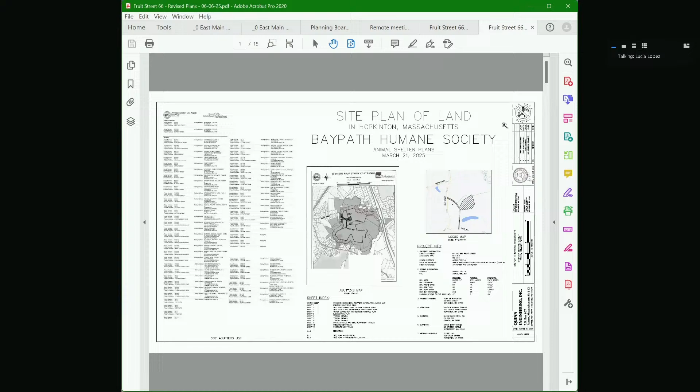To the chair, yes, Lucia. I did have a question unrelated to the waiver. There are several site plans in our packet, they're all labeled March 21, 2025, and I know that the site plan's been revised several times. I don't know if there is an updated date on those. I just was thinking in terms of the process to make sure it's the right one.

Yeah, I see that even though the file names have June 6th, the dates are still March 21st. John, is there comment on that? So the plans you're talking about? The plans, yes. Yeah, so I've brought up the plans here. And what they do is, so the plans are dated March, whatever it is, but then we go by this revision date, and that's the most recent. So the most recent we have is from June 9th. So that was probably just a typo on my part.

That's actually probably a typo on my part, but that's usually what we do, is follow the most revised date. So when we actually write the decision, it'll say, and you'll see it in the comment or in the conditions, as of date, June -- is it June 9th or June 6th? Dated March 21st, 2025, last revised, and then that date, June 9th. Okay, thank you.

Okay. So on the subject of the trees, for those of us that were on the site walk, I think we looked around as well, and most of them were fairly junior trees. So that was something that I think a lot of us saw.

Does anybody have any concerns, either requiring -- do people have opinions on whether a waiver would be required in the situation? I mean, John, do you have an opinion on whether a waiver would make sense here? I don't have an opinion. Trying to find the exact terminology. This is up to the discretion of the board, right? So it's not requiring a waiver.

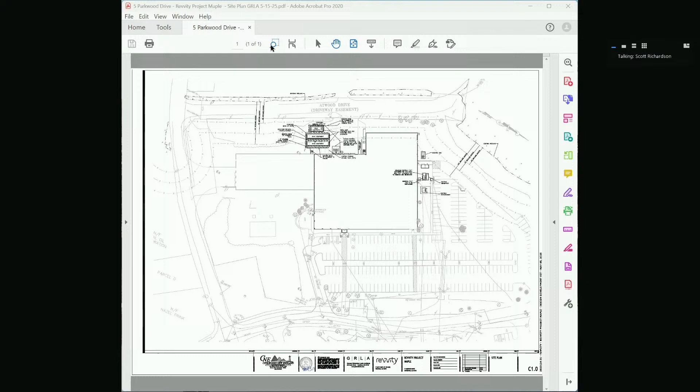Interestingly, the ground-mounted equipment is actually being located in a former paved parking area, where we're basically going to be removing some pavement, installing some concrete slabs and some stone. So we're actually increasing some pervious area, as you can see in the site plan, towards the back off of Atwood Drive. And interestingly again, this is in the buffer zone.

So the applicant has applied to the Conservation Commission. They've had their initial meeting and initial findings, and they have a subsequent meeting tomorrow evening. So it's basically in front of the planning board for the installation of this ground-mounted equipment, as well as the rooftop exhaust systems.

These rooftop systems are not insignificant, but we believe that since they are not too visible from public ways, the front of the building and the side of the building on Elm Street, the most visible part is this equipment in the back, off of Atwood Drive, which is primarily an industrial drive that accesses the business.

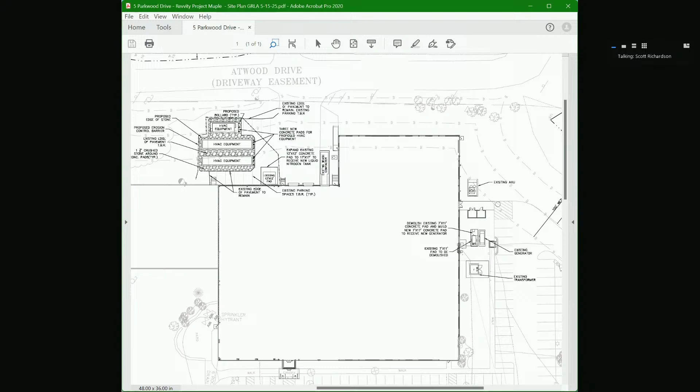There are some renderings in the package that do show the equipment and so on. Interestingly, the other aspect is the parking.

So if you go to view number 1, you'll see this is kind of going down Parkwood Drive. The building in question is on the left, which we're looking at here. And you can just see there's about a 6-foot rise to the front door from Parkwood.

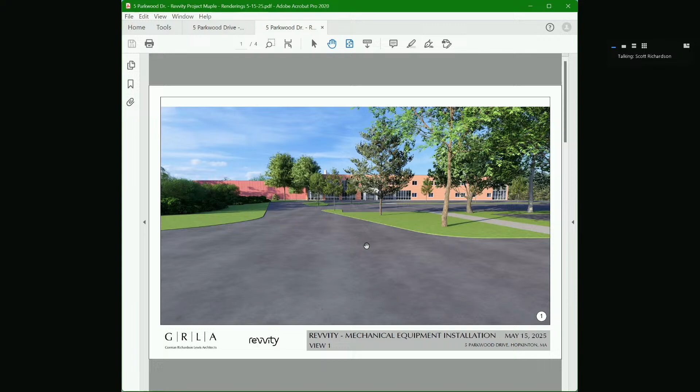And then you do see one or two of the exhausts there in between, kind of towards the center of the picture, that do stick up a little bit above the roof line. They would be extending about 16 feet above the main roof, but because of where they're located, really set back from the front of the building, well over 100 feet, this is about what you'd be seeing.

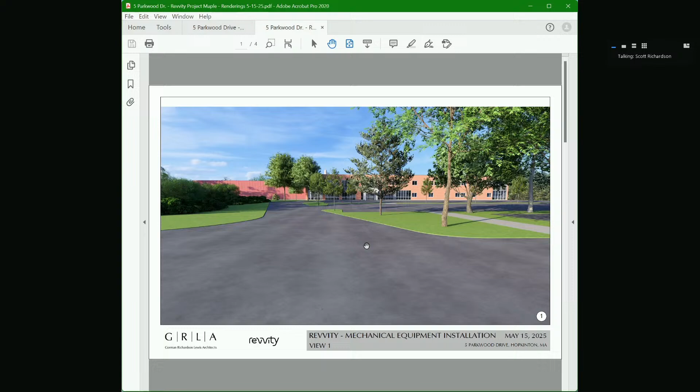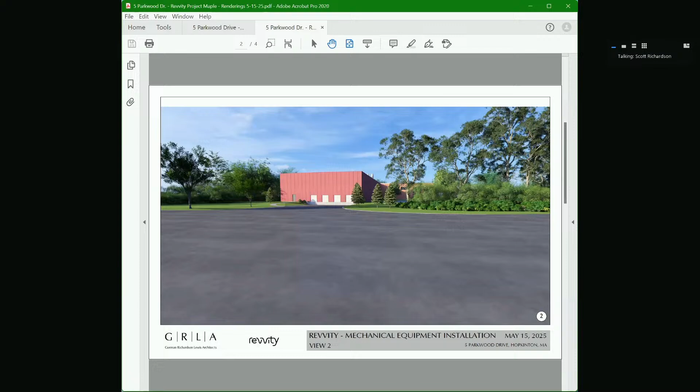View 2 is the view off of Elm Street, where there's a loading area for Revvity, and you can just see a couple of the exhaust equipment just peeking above the roof, kind of again in the center of the rendering.

The next rendering shows a view from Atwood. This is the ground-mounted equipment that then has ducts that extend up to and over the roof. So this is the larger equipment, and for a variety of reasons, we're locating them on the ground because it is really the best location for these pieces of equipment.

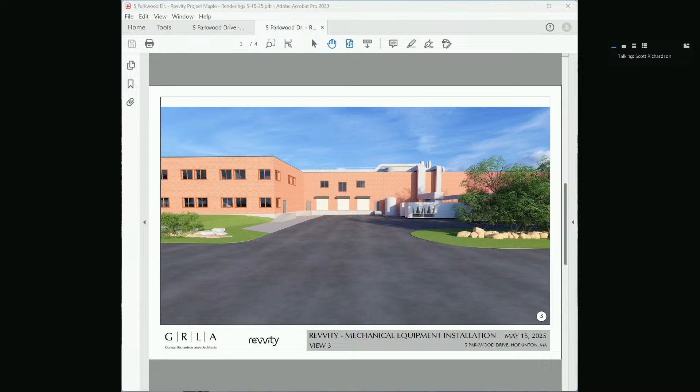And then this is the existing loading area for Revvity at this location, additional loading. And then the last view is as you would drive further down Atwood, you'd have a view looking back at the ductwork that's extending up on the roof.

The other thing is that the ground mounted equipment is also displacing some parking spaces. But interestingly, in the original approval for the project back in 2012, where we did additions to both buildings and renovations, we did get a waiver for parking at that time. Basically, given the use of the building as a lab space and research and development, the number of occupants was far below what the bylaws were requiring. So we did get a waiver for parking for future, basically saying if we need this parking, we can build it.

So the original parking on the site was 488 spaces. Based on the use of the building now and the lab requirements and the occupancy and the current parking regulations, based on the square footages for both buildings and the use of the buildings, we actually only are required to have 433 parking spaces.

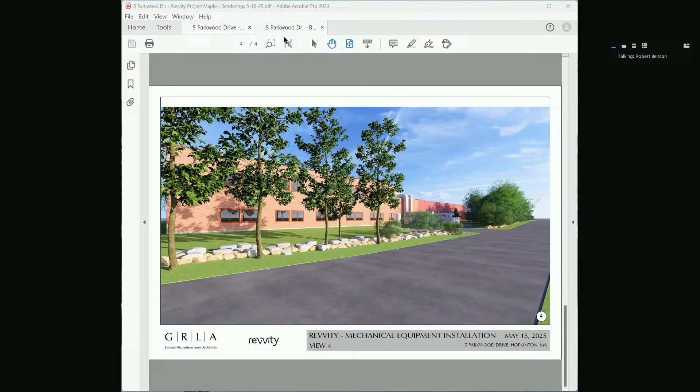Does everybody on the board understand this isn't like industrial, or like the buildings that are behind the All Town Fresh, in that section, that's where these buildings are.

Does anyone feel a site walk is necessary in this instance? I'm of the mindset this wouldn't warrant a site walk, unless anybody feels strongly otherwise. I agree. I don't think we need a site walk.

Does anybody have any initial questions for the applicant? Or otherwise, I'm going to try to get right into the hearing, follow our outline.

Matthew, go ahead. Not for the applicant, I don't think, but for John, I'm just confirming that because the parking lot is actually shrinking, the EVSE requirements don't come into play here. Is that accurate? Yeah, correct. Okay, thank you.

Through the chair, is that electric vehicle charging requirement you're saying? Yeah, in the past couple of years we as a town added bylaw language requiring electrical vehicle spaces, or EV ready spaces, but because this isn't a new project, that requirement is not there. I'm pretty sure Revvity has installed some EV charging stations on site. Okay, good to know.

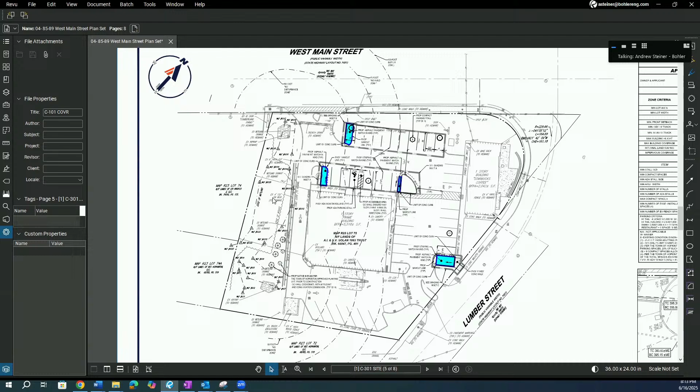We haven't necessarily seen anything formal, but understand there may be comments or concerns from additional town departments. So obviously we're here seeking approval, but understand we may need to continue to work through any of those comments, concerns, or questions that different departments may have. But we definitely wanted to take the opportunity to present in front of the board this evening and get some additional feedback. So with that, I'll turn it back over.

Thanks, Andrew. John, can you give us a staff report on this proposed project?

Sure. So this is a minor site plan because they are modifying a parking area. However, it does not meet the criteria for a major site plan in terms of parking lots.

One thing the applicant has noted is that there have been some concerns from DPW. They're concerned that the stormwater is not going to be managed appropriately. So that brings up a question for the planning board: we usually don't have the peer review consultants on board doing the review for minor site plans like this without the board requesting them. So that's something the board should decide, whether we want to get a peer review on this or not. We have not gotten one done yet.

That was going to be my question - was it due to the water accumulation that's been occurring near the entrance on Main? I was curious how the applicant was taking that into consideration.

I'm with John that we should probably have a consultant review, and that was one of the questions I had. The other comment I have is regarding the waiver for the EVSE. It is a minor change - they would have to rip up the parking lot to add the required EVSE or EV ready spaces. So it seems like in this situation, a waiver may be warranted for not providing that EV parking space.

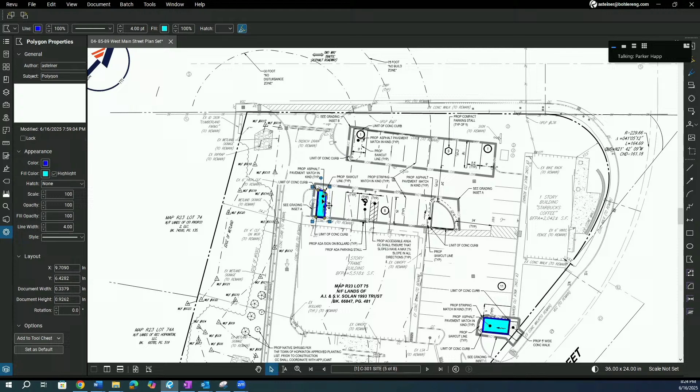Yep, so the town put the border or barrier to not do a left turn because there were some pretty severe T-bones that happened. I think it's a lot safer now. Was there any consideration in doing a major adjustment to this plan and effectively making it one-way in, taking more space back from where that curbing is, limiting essentially that to just an entrance and putting more spaces there? Was that part of your guys' consideration at all, just out of curiosity, or not really?

So go ahead, Andrew. Oh, sorry. So we tried to maintain the existing traffic patterns as part of this, which include, I think we included a truck turn exhibit, which shows the Hopkinton fire truck navigating the site. So we didn't really want to make any changes in that regard, which again shows the right-hand turn coming out of the site onto West Main.

I'm sorry, you lost me. What does a fire truck have to do with considering removing the exit? Just in terms of circulation, to make sure that we weren't impacting the current layout and how an emergency vehicle would navigate the site as it is today.

So your concern is that if you take space back from adjusting that, a fire truck couldn't navigate around the building on the left side if they were going to go behind the bank out that way, essentially? Is that what you're saying? Potentially. So the way we had the fire truck come in from Lumber, because this is the signalized intersection here, it pulls into the site and can circulate as it is now, but they could come back out and head this way, I suppose. Coming up and coming out is I think currently what would happen today, but I think that would be something we'd have to ultimately get feedback from fire on.

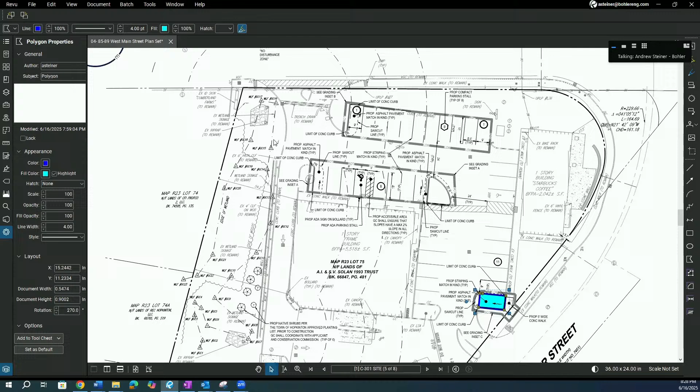Lucia, go ahead. I see that there's a requested waiver for EV parking, and I was wondering what triggered the need for a waiver.

And I think Vic asked that question, right? So our town bylaw changed from the time this was built to now. So when they built this site out, there was no EV parking requirement in terms of EV ready spaces or EV spaces in general, so the requirement wasn't there. So this minor site plan change to add 4 parking spaces would require the waiver, because when they originally built the parking lot and the buildings, there was no requirement.

And if the waiver were not granted, how many EV spaces would they need to add? I believe 5. We would have to add more EV spaces than the number of parking spaces we're requesting.

Thank you. Matthew, go ahead. Yeah, I think it's 5 EV or 9 EV ready, 10 and 20%.

So yeah, Lucia, I think from the applicant's point of view, if they can't get that waiver, they're not going to build this. It wouldn't make sense for them, is what I believe.